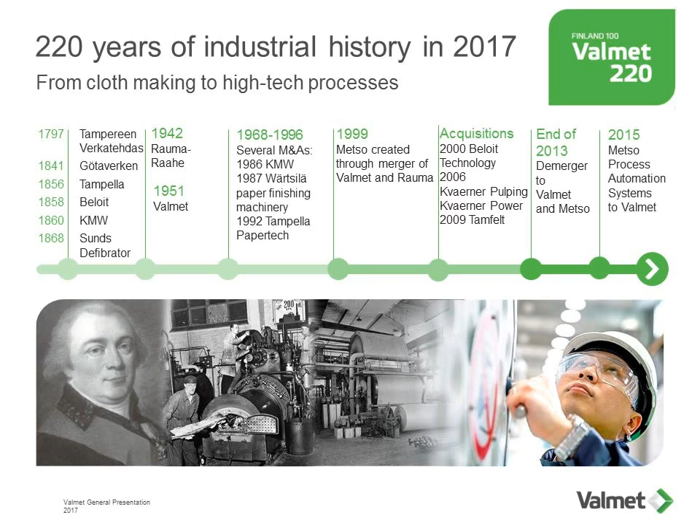In terms of our business, Valmet is roughly a €3 billion company, a little bit more on the orders received in 2016, a little bit less on the net sales side. We had about 200 million euros in EBITDA, which equated to about 6.7%. Our goal now is to increase - the story we go to the stock market with is we want to be an 8 to 10% company. We have, since we've spun off, grown every year in terms of our profitability, and we expect to do that as we develop the organization further.

In terms of geographic breakdown globally, Europe is our biggest market, close to 50%. North America is second with roughly 22%. We float around 20% year after year depending on how cyclical the capital business is and how these stable businesses continue to grow.

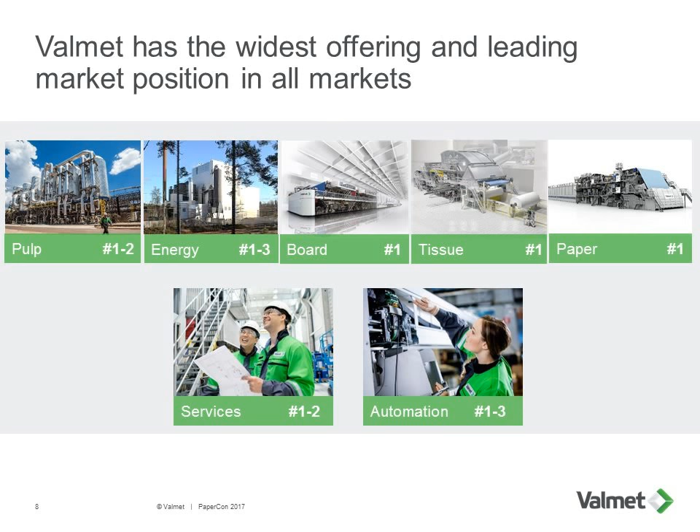I think that our offerings in general - we're offering a host of solutions, equipment, and so forth across pulp, paper, and energy. And generally, we feel as though we're, if not number one, right in the top of the spectrum in terms of what we offer. And again, foundationally, service and automation we're very focused on in terms of bringing those solutions into North America more and more. We like to think of ourselves as a process technology supplier, but of course, again, just to repeat myself, we're very focused on service and automation. We bring all three corners of the triangle together for providing solutions.

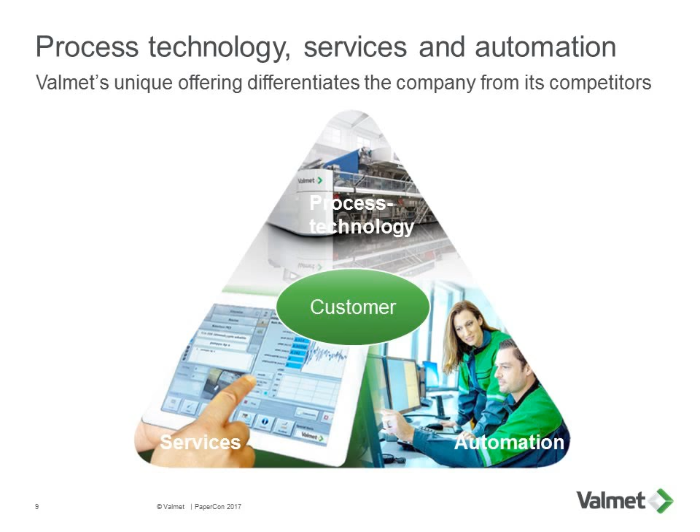We are very proud of the fact that we're recognized as a company that's on the Dow Jones Sustainability Index. The second year we reformed as Valmet, we were acknowledged for that. We take pride in building sustainability into our designs, but also the way we operate. And we are seeing across the world, really, our customers are not expecting it - they're demanding that we are operating in a sustainable way. And as well, we want our sub-suppliers to operate in a sustainable way.

In terms of research and development, my colleagues will talk about this in more detail in their presentations. I'd just say we have 16 R&D centers and spend more than 60 million euros annually on developing products and solutions. We try to focus on gaining insights from our customer base in terms of needs, whether performance enhancing or reduced maintenance. But at the end of the day, it's all about producing a better product for lower cost, and that's what we're trying to achieve.

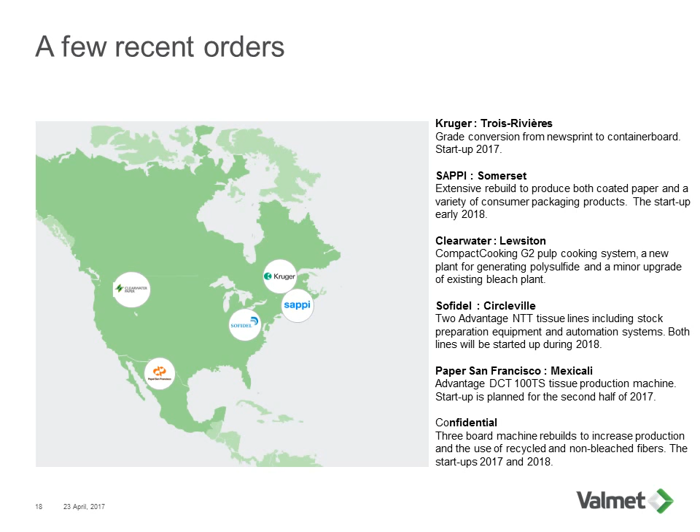So just an overall sampling of some of the activities, as well as our ongoing service and stable businesses. So in summary and conclusion, we would say that North America is quite active, particularly when you talk about grade conversions, upgrades, but also new machines.

We see that investments are stronger - and I know this is kind of general - but investments are stronger in tissue and board and declining in newsprint and printing and writing. I think everybody in this room probably knows that already. We are continuing as Valmet to invest in the things supporting the market, supporting the demands of the customers. We're doing that globally, of course, but we're trying to focus on North America because North America is a mature market and has its own set of needs and so forth.

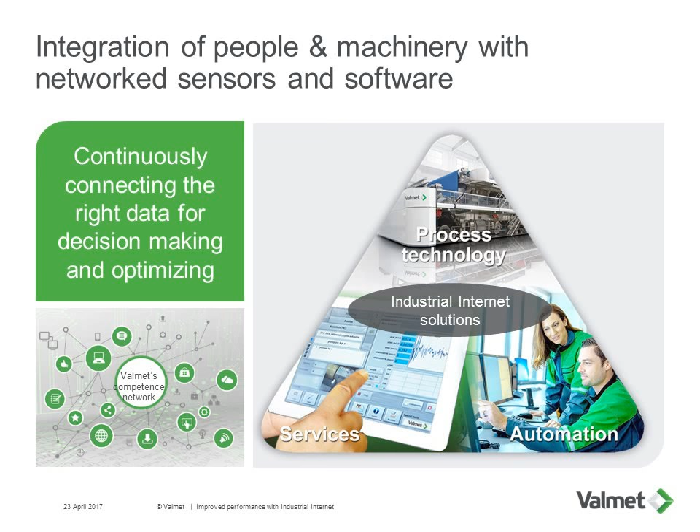And we have all the pieces to really be able to develop industrial internet in the direction that we feel is most useful to you. Process technology, services, and automation all really feed into this solution.

So today we actually have already quite a number of applications in place. As you can see from the numbers here, we've supplied 780 lines with Valmet automation platform, 380 condition monitoring, and with over 70,000 tags, 350 advanced process control installations. And there, especially the performance side is very important. They all have remote connectivity, and some of the industrial applications of industrial internet infrastructure is already there. And 90 performance agreements with remote connections.

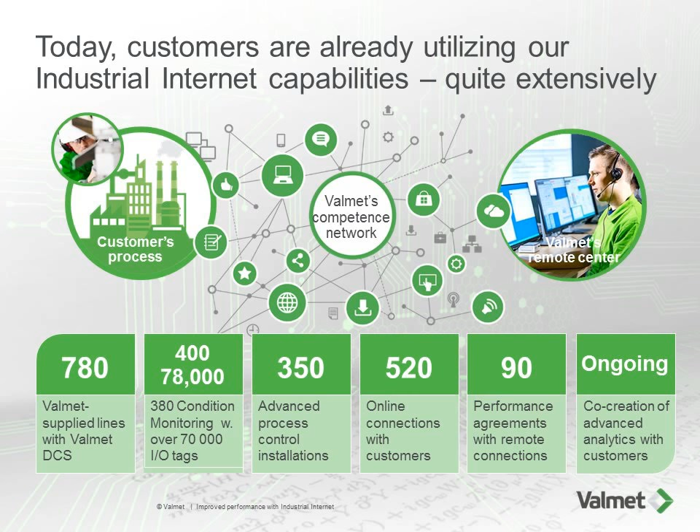And finally, and this is the piece that I want to focus on a little bit, and I specifically said co-creation here of advanced analytics with customers, because this is not just done by us. This is where we need to work together to advance the analytics part of it, and that's where we are heavily engaged in now. We have done several applications, but most of them came as a driver for our business where we see the need. But now is the best time to cooperate in this area and hear some of your needs.

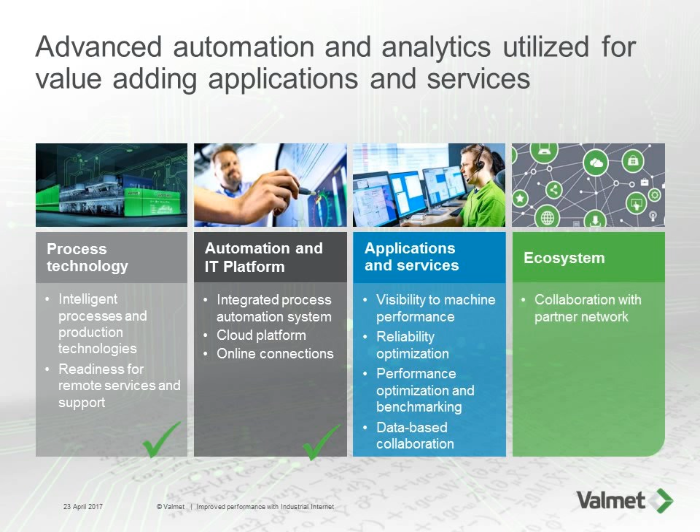So another view here, looking at the advanced automation analytics and utilizing that for value-adding services. We already have the process technology. We have the automation and IT platform in place. And now our focus area is application and services, more in terms of analytics.

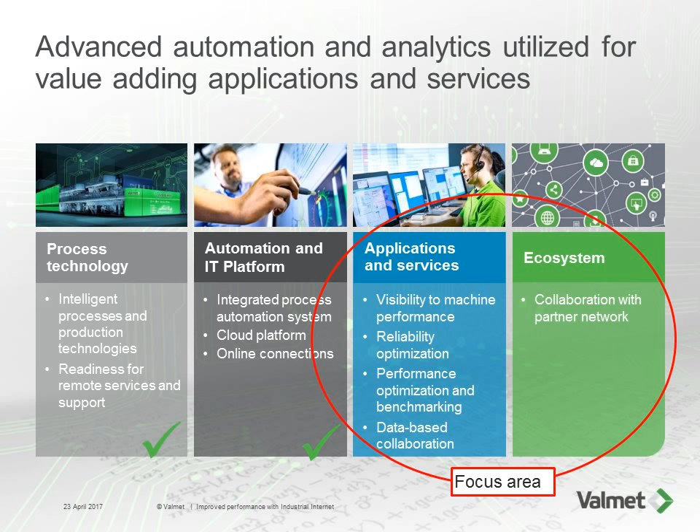Of course, these applications we have supplied on machine applications for a long, long time, and we've connected that remotely. How do we take that another step further? That's where we are heavily engaged in now. And ecosystems, that's mostly collaboration with partner network. That's a priority for us as well.

So this is yet another view here, value generation through different levels. Expert support solutions we have been doing, as you saw from the numbers. We have expert centers. Most of our installations are connected 24/7 to experts available to serve you. Analytic solutions exist at the level where we could bring them, but now we need to do more of that. And on-machine solutions, of course, have been there for some time.

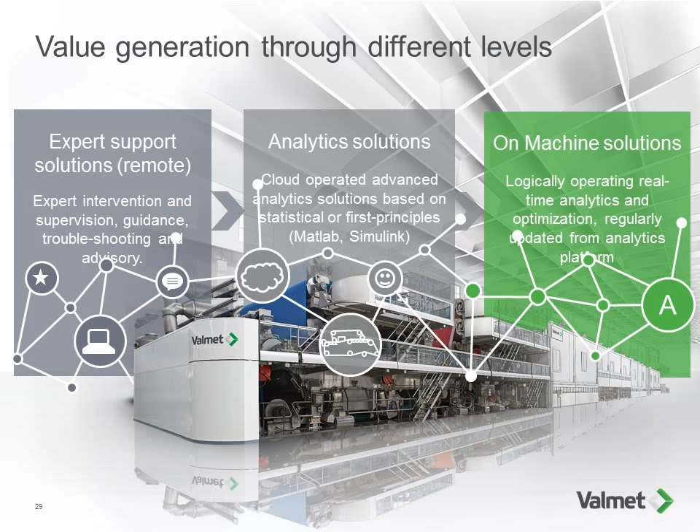So I'm just going to take one of them and then elaborate with a few more examples of industrial internet applications. This is the remote centers, which are really the engines to digital services. And there we have quite a number of installations, 780 lines, where we supply, as you saw also from Dave's presentation, performance services and reliability services. These are connected. Connectivity is no issue there. They are safe, secure connections, connecting data and experts and serving you.

They have advanced analytics, but of course there's a lot more in that area, and we do real-time monitoring with that, and provide digital services like learning from the fleet. Training modules are available, simulation modules are available. Some of these things are actually answers also to what is being discussed so heavily now, the aging workforce, experience leaving the organization. So these are some of the elements of solutions that is already utilized.

And visibility, we've been engaged in that quite a long time. Visibility to system performance, which is really now becoming more widely used also in other industries. Coming up here, when your luggage is loaded, you get a message on your phone.

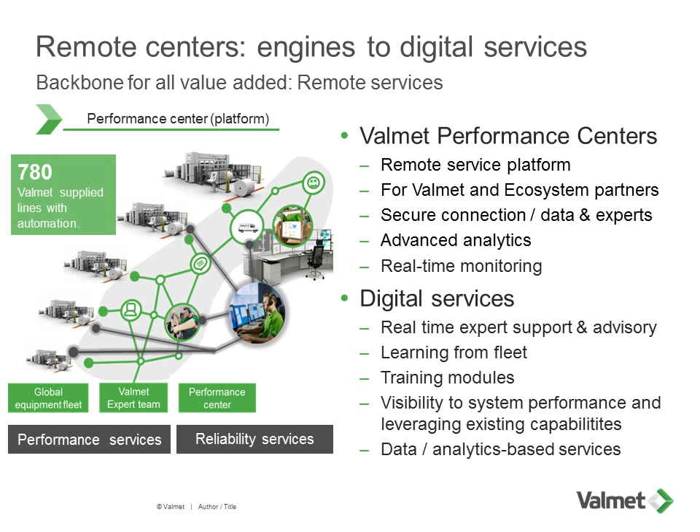You get a message of where to go pick it up, and it continuously monitors and follows, so you're constantly in touch with the things we used to worry about—is it there, am I going to get my luggage. We've been doing this kind of performance monitoring for some time, sending alarm messages to your phone and email so you have instant information. That's the urgency of data I'm talking about. Urgency really needs to be there.

Now some examples. The first is from performance visualization and benchmarking. As most of you familiar with our solutions know, we always take the holistic view of the process so we can do very effective optimization, and that's all in real time.

This is an example of fleet management where you can connect several machines to a remote center. By taking the holistic view, we can monitor production, energy, and quality. This is mostly done through well-defined key performance indicators, so the driver really is the KPI dashboards in front of you. You can receive that information anywhere, anytime, especially when it's passed through alarm prioritization and warnings—that becomes very valuable information.

Machine and shift performance comparison leads me to benchmarking. All of those things exist now. And how do we do it? Through dashboards created in Valmet Cloud and visualization through Valmet Portal.

The portal is another activity we're heavily engaged in, now developing it in a certain direction. This is where we need your input. We're already piloting it, and we'd like to get engaged in discussions with you. The direction really depends on your needs, and that's where we need to co-create the concept, the future concept.

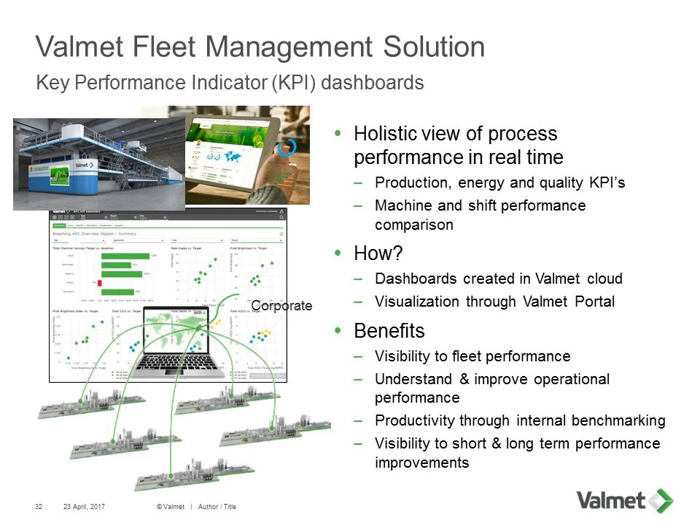Benefits are obvious: visibility to the entire fleet, understanding and improving operational performance, productivity through benchmarking—that's very valuable information—and long-term and short-term visibility of performance.

This is an example of benchmarking where the one in black is compared to other operations, including some average operations like liner grade average in the second line, fluting grade average, so you have a very good basis for comparing the machine and monitoring in real time what's happening to it.

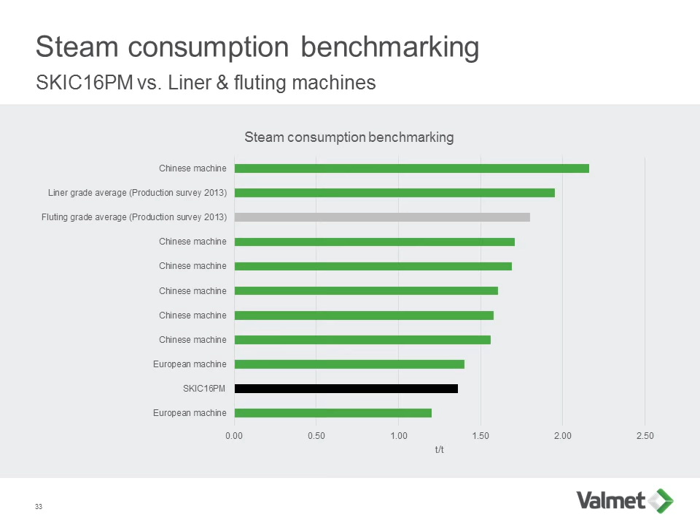The next case is diagnostics, again related to performance. This can also be done with a fleet type concept or a single machine. Here's an example we've done: FormMaster with KPI monitoring.

This is making sure that the strength properties and formation and uniformity are good, where data is received from the FormMaster.

Through an industrial router, we put that data in the cloud, then connectivity to Valmet offices and the customer portal. Through this kind of means, you get a good idea of the equipment status, the need for service, the maintenance needs—that's really where we are headed: alarms, fleet data, and connection to the Valmet expertise center.

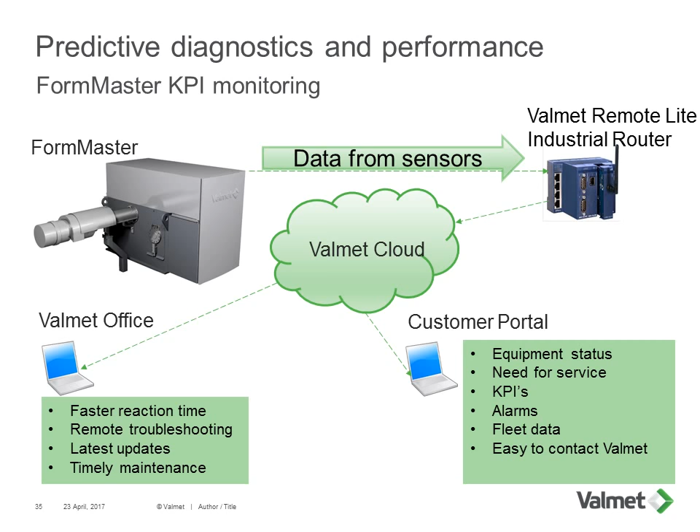That way we can react faster, do remote troubleshooting, know exactly what's happening, and advise you of maintenance needs. This is really for better availability through constantly real-time monitoring of the system.

Now you can take this in several directions. It's not just limited to one piece of equipment like FormMaster—you can do this on the presses, the reel, the winders. And the other direction, of course, is all of your machines, all the machines of the organization. So in two dimensions, this can grow for your organization and bring a lot of benefits.

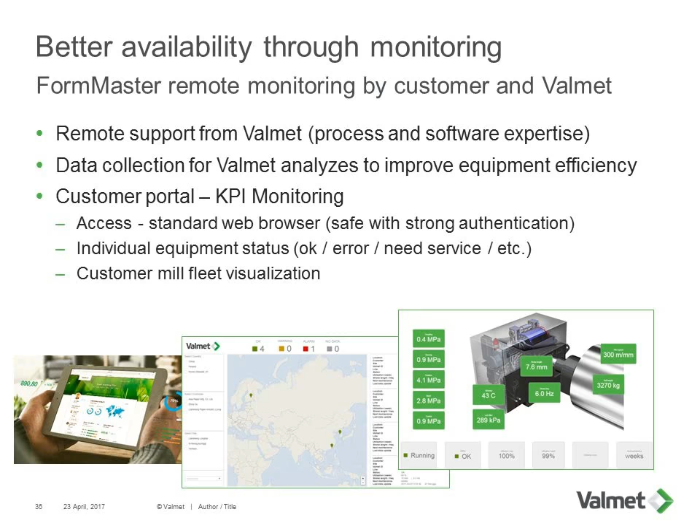The next example is energy optimization. Again, this all goes down to the bottom line—you can achieve significant savings in both steam and electricity through data analytics. My example here is from Thailand, PM16, where I have the machine data making 90 to 150 GSM recycled fluting. Design speed is 1200, and it was started up in 2014.

Here we've applied our solutions, and you can see the result is increasing the steam efficiency for the same grade, at 125 GSM, at 45 tons per hour production rate. It went up to 1.46 from 1.28—sorry, I switched consumption to efficiency there, it goes the wrong way otherwise.

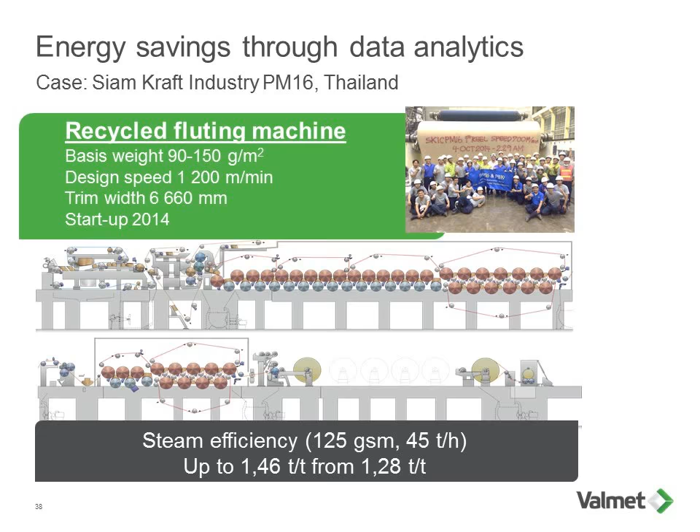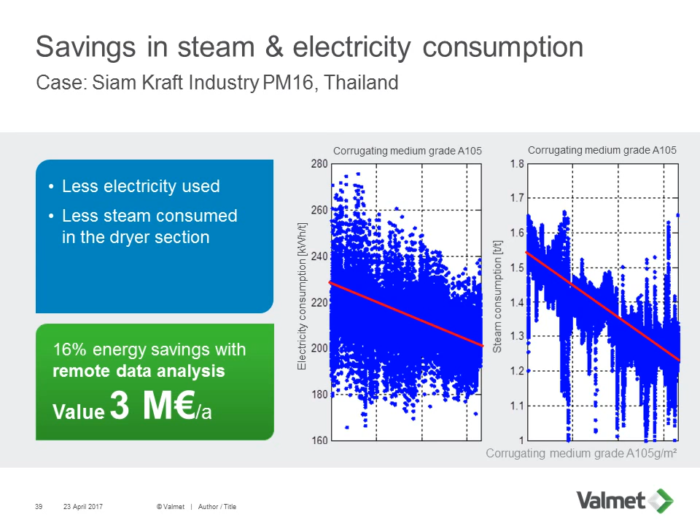The result is 3 million euros per year in savings, combined electricity and steam. The next case is paper quality control and variability reduction, again through modeling linerboard strength properties online.

You see here burst index and SCT CD index modeling, the blue and the red are hardly possible to distinguish. One is the model, the other is the real data. So you can see there's an excellent fit between the measured and estimated burst index and SCT CD index. Again, the details are given there.

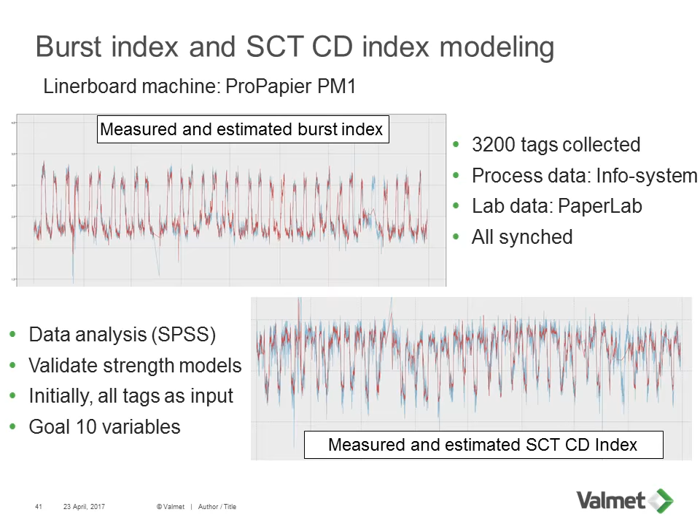A lot of tags are monitored, with data coming from different sources, and they all have to be synced. You can't just use that data without good synchronization. The method here is through statistical methods. We do the data analysis, validate the models, and then reduce the tags to the ones that really matter for predicting and estimating. In this case, 10 tags.

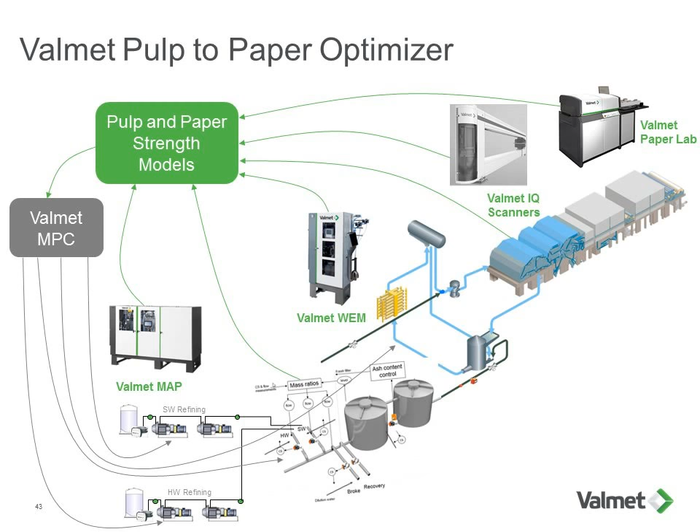The next case is Pulp to Paper Optimizer, from Stock Prep Modeling and Optimization. Here again, measurements matter a lot. We have the freeness measurement called MAP, which has recently been improved in terms of its capabilities with a high-definition camera, being able to see all the properties of fiber and fibrillation indices. Using that as the heart of this application and getting data from all the other sources we need, we're able to do strength modeling and improve the strength properties.

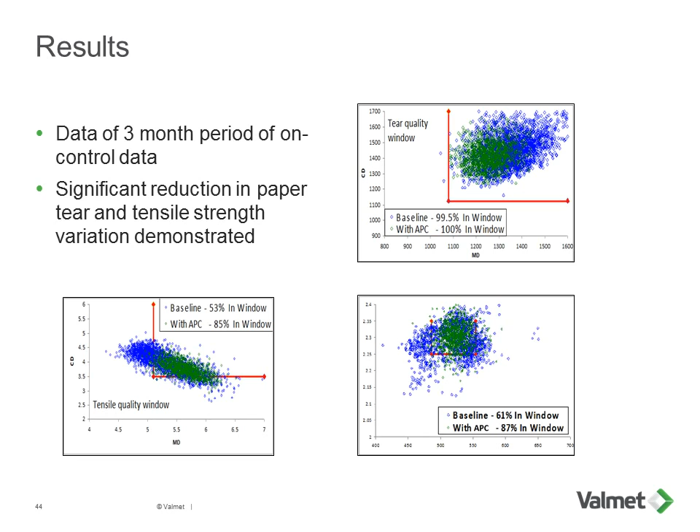You can see here an example where this was applied. You see the tear and tensile qualities here. What the data indicates is that the blue is when it's off control, so it's a big cluster spread around, a lot of variance there. And the green is after the application of this kind of thinking. So there's a significant reduction in paper tear and tensile strength variation, as you can see.

And we'll continue with Rex, looking at the R&D work at Valmet.

Thanks, Seyhan, and good morning everyone. As it says up here, my topic this morning is Valmet's R&D at work. And by the phrase 'at work', I'm referring to the fact that I'm going to give you 4 examples of things that are in various stages of development and implementation. Two of the topics will be things that are already commercialized, doing quite well. One will be in a prototypical stage, and then one is fully under development.

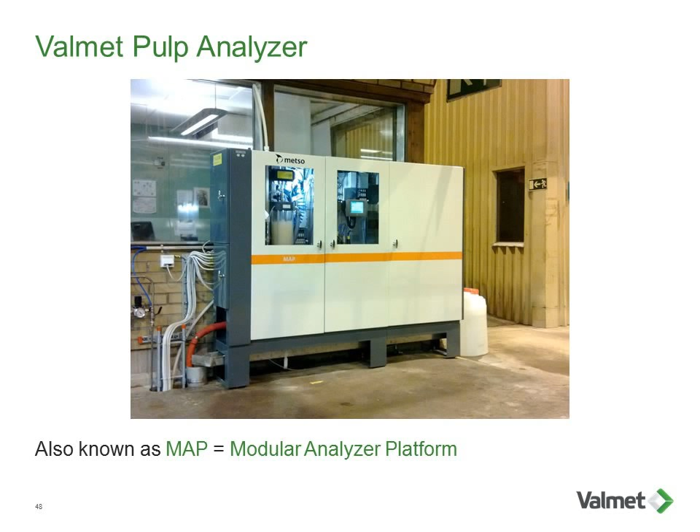Let's start with, surprise to me, a topic which Seyhan just touched on, so I'll move through it a little more quickly than originally planned. If we look at our Valmet Pulp Analyzer, or the MAP system as Seyhan referred to, this is a remarkable system. It does an excellent job of measuring pulp and fiber characteristics coming to the machine. You can see that it's very well accepted, with 238 references in the world and 68 in North America.

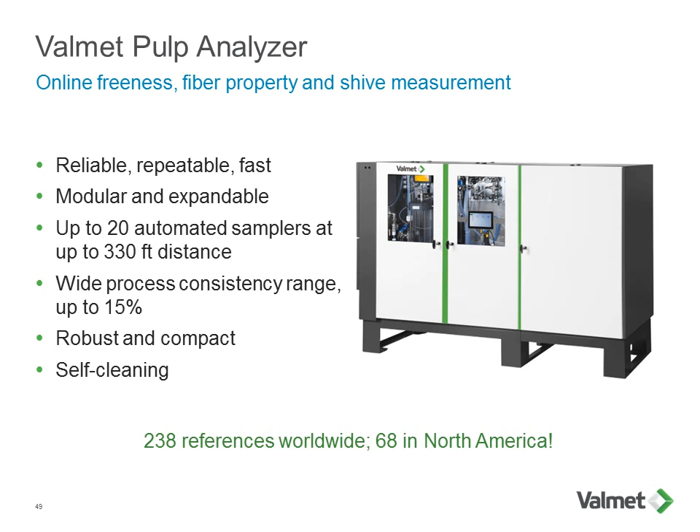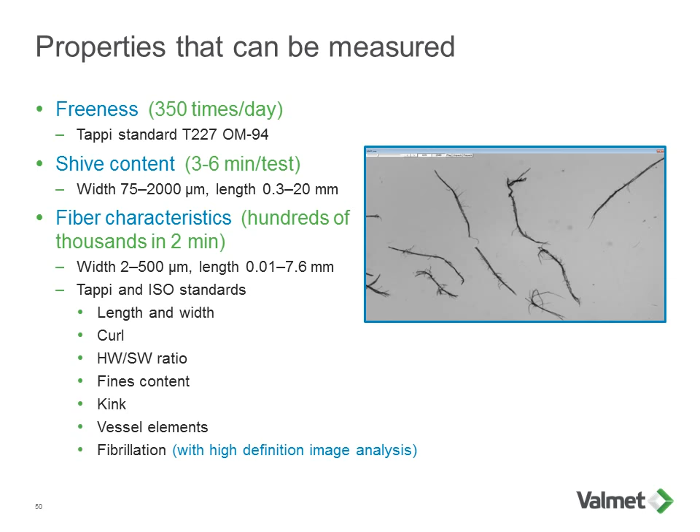What's remarkable about it is all the properties it can measure. Obviously freeness and shive content, but look at the fiber characteristics down at the bottom of the chart - odd things like curl and kink, and a fibrillation index with our high-definition image analysis capability. These are important characteristics for making paper and board, and this is the example Seyhan just showed.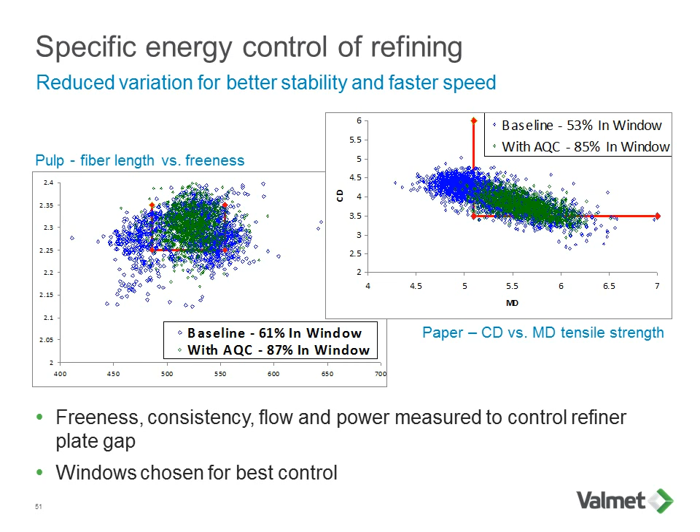But imagine doing this in a real-time predictive mode, where you could take these properties and measure them with the excellent capability of the MAP system, measure other process variables, and predict and control the final quality off the end of the machine. And that's exactly what our automation guys are working on right now.

So here's an example of some of the modeling we're doing. This is a plot of STFI stiffness, and we're measuring various properties of the furnish using the MAP system and measuring important paper machine process variables. The green curve shows the actual measured STFI off the machine. The orange curve shows what our predictive model says the property should be. You can see the agreement is excellent, very low error here. That's remarkable that we can do that.

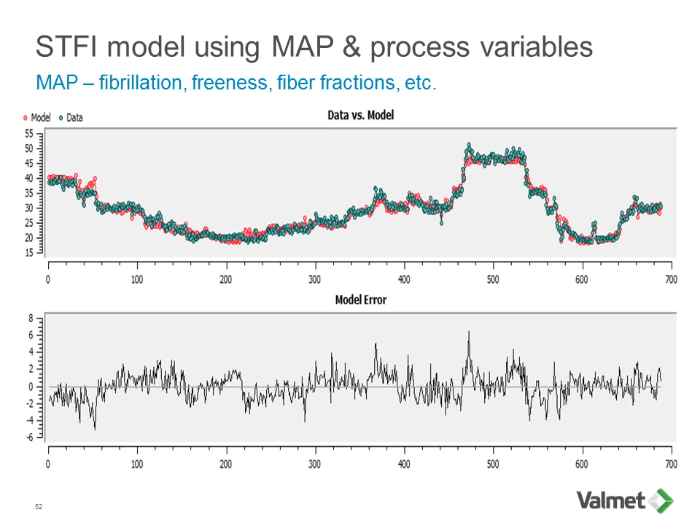There's another example from the same work. This is looking at Mullen, or burst strength. And again, excellent agreement between the predictive model and the measured quality off the machine.

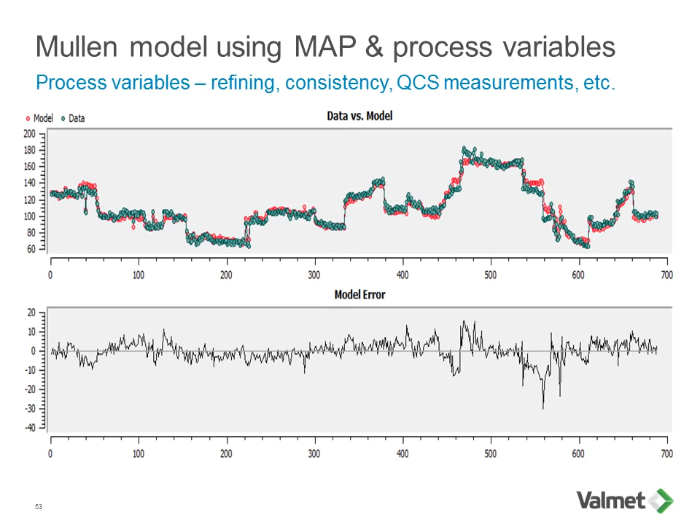If you really want to know more about this, come to a session on Tuesday afternoon. We'll be presenting this paper using automation to predict and control board strength properties in real time. It will be presented by Greg Freilich from our automation group. It's Tuesday afternoon, 1:30 to 3 o'clock, a joint session of the process control folks and the recycled paperboard people. I think you'll find that a very interesting topic.

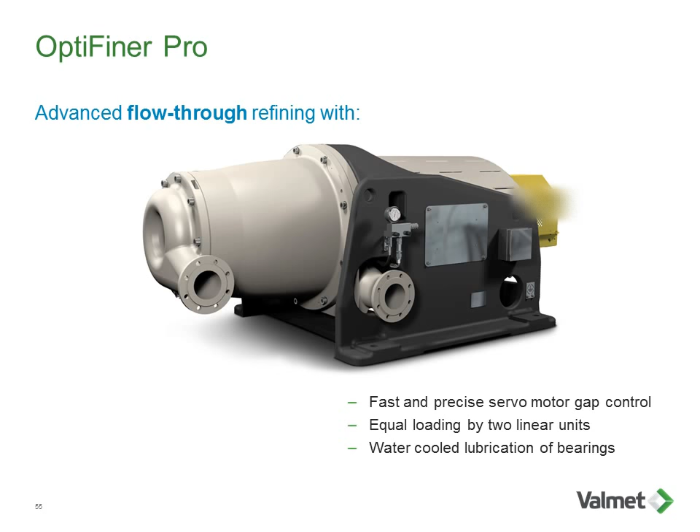My second topic is something closely related to this, and this is some new refining technology. This is well implemented and gaining acceptance all the time. What's special about it is we call it advanced flow-through refining. If you have old conical refiners or double disc refiners, most of you know that a lot of fiber passes through those devices without getting much treatment, and they have very high no-load energy use as well.

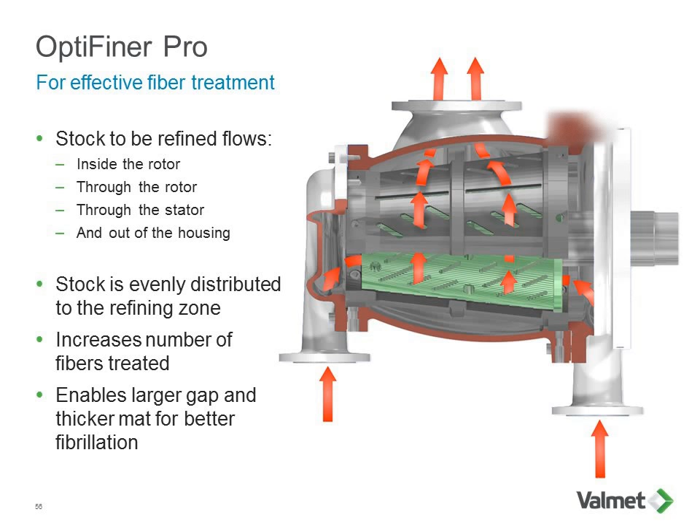What's special about OptiFiner Pro is how we manage the stock flow through the refiner. If you can follow these red arrows, at the bottom you'll see there are 2 arrows. We're bringing stock into both ends of the refiner at the same time, and it enters inside the rotor. Then the stock must pass through slots in the rotor to the gap between the rotor and stator, and then it has to pass through slots in the stator to get to the housing of the refiner and exit the process. So it's very difficult for a fiber to pass through this without getting treatment, and we have much more effective refining going on in this process as a result.

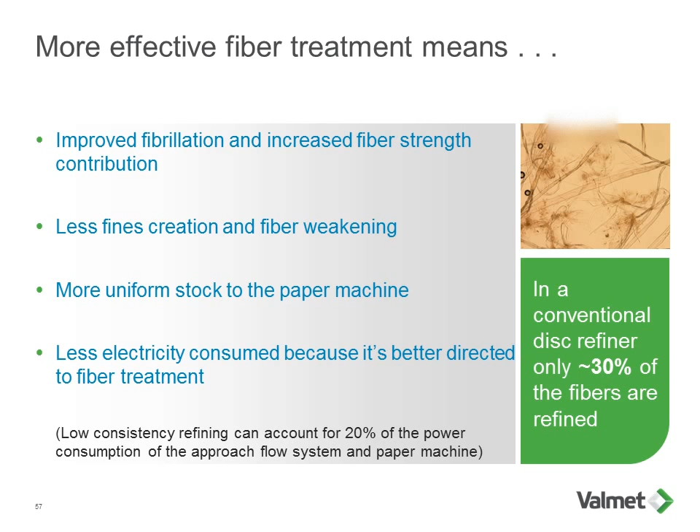What we get is typically a lot more emphasis on fibrillation and getting more contribution of the fiber strength to the final product quality, creating less fines, doing less cutting, definitely more uniform stock going to the paper machine. Ultimately, we find that it has a very low no-load power requirement, so it's a much more efficient process as well. Here's an example of the strength development.

It's a tear and tensile, combined tear and tensile plot. If you look at the green and orange curves at the top, those are OptiFiner Pro. The black and gray curves below that are traditional refining. The key is for any specific energy level along the x-axis, we're getting a lot more fiber development with this type of refining.

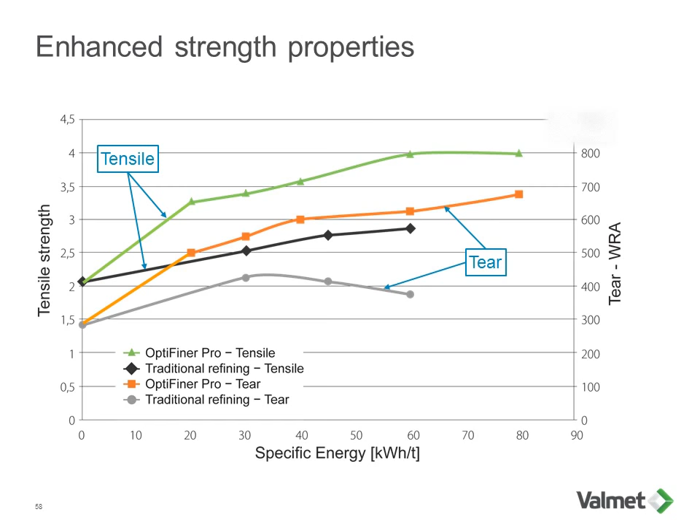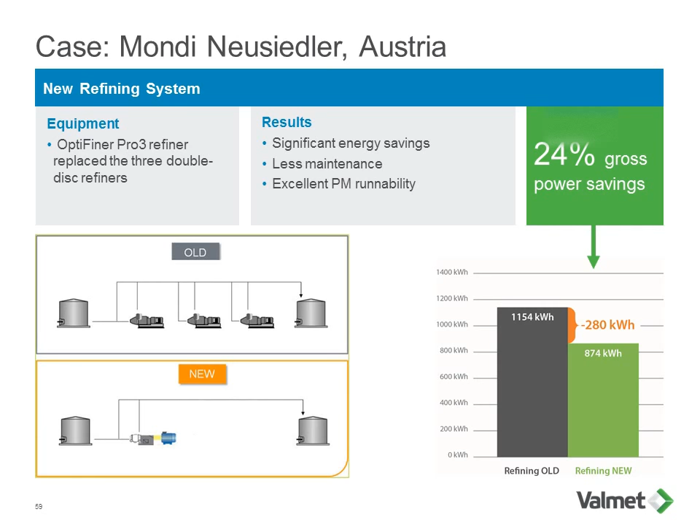So over 70 of these have been sold so far, and I like to think of something like this in combination with the MAP measurements and the real-time predictive modeling we can do. Some of this is going to come together very nicely.

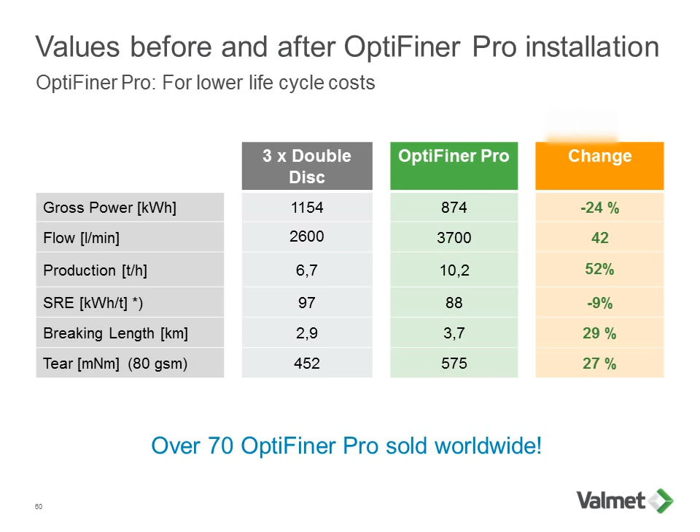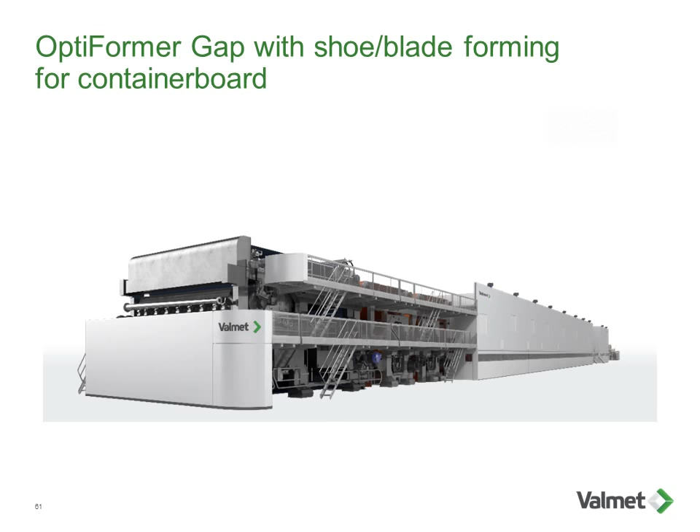My next topic has to do with a new approach to gap forming for containerboard, and we call it OptiFormer Gap with shoe blade forming. If you look at the trend in containerboard forming concepts worldwide for about the last 20 years, we see that overall basis weights worldwide are tending to go down, machine speeds are going up, there's more use of recycled furnish, and the quality of recycled furnish is getting worse too.

If you look at the forming concepts on this trend chart here across the bottom, on the left side you see multi-fourdrinier or fourdrinier-based forming. It has overall a higher basis weight capability, but typically slower speeds, max speeds of around maybe 3,800 feet per minute. Over on the right side of the chart, an extreme, are the gap formers. These are the fastest machines in the world, up to 5,000 feet per minute. Most of them are on recycled machines with size presses as well. And of course, the reason for that is also the characteristic MD-CD fiber orientation associated with these processes.

So fourdrinier on the left side, you can see the minimum gets down to about a 1.7 ratio. Typical roll blade gap formers maybe can get as low as 2.5. And of course, that's a detrimental thing when you're aiming for CD ring crush or CD stiffness, that sort of thing.

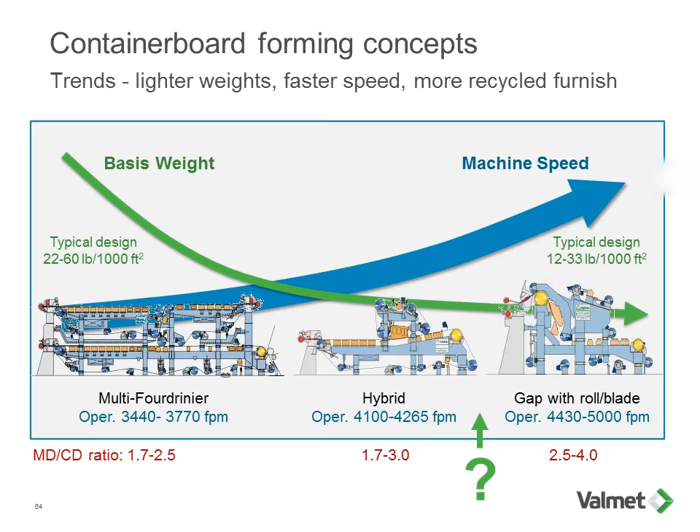So what if we have a concept that's somewhere a tweener, if you will, and that's what I'm talking about. With this OptiFormer Gap with shoe blade technology, you can see on the left side we have a 2-layer head box feeding the gap between the top and bottom fabrics. What's most important here is we're doing less aggressive initial dewatering than what we would with a suction roll in a conventional gap former.

Right after we get past the gap, we've got a 2-chambered curved vacuum shoe on the bottom. On the top, we have a 4-chambered suction unit with 21 blades at the back end for doing pulse dewatering as well. The initial formation of the web takes place very quickly, but without pulsation. So we're getting very nice surfaces formed, very good retention, excellent formation quality. And then when we've consolidated the web a little bit more, we're hitting it with the pulsation drainage.

You can think of it a little bit like a hybrid between a hybrid and a gap former, if you will. And what we see, what's a nice feature of this, is the MD-CD ratio is reduced. We can get down to 2.0 with this technology.

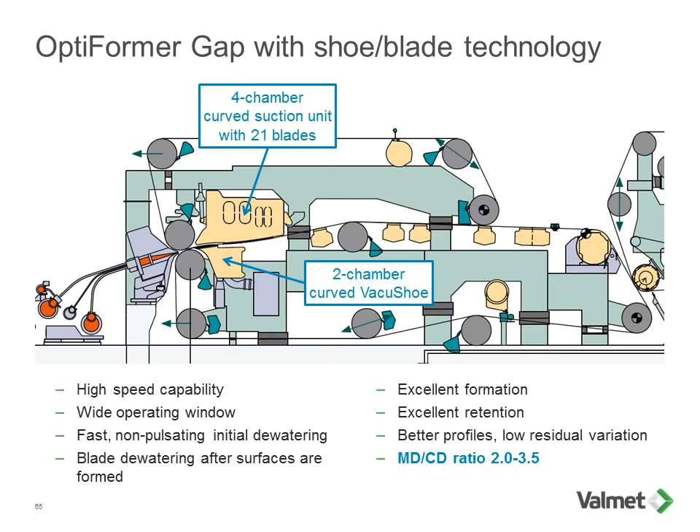Looking at another comparison we recently put together for an example of a 222-inch reel trim making 19 pounds per 1,000 square feet recycled liner and medium. You see on the right side of the chart, in terms of speed capability and production, a 23% gain with this new type of former.

But it's also noteworthy that it takes a lot less power for the approach flow system and the forming section. We see about a 40% reduction in the electrical power requirement for this kind of section. And you can see, obviously, just looking at it, the length difference. In this particular example, the forming section is about 60% shorter than the fourdrinier section. So those are also pluses.

The minus, down at the bottom I have in red, is again the MD-CD ratio is not quite as good. Well, what can we do about this? Well, as I said, most machines of this sort in the world now have size presses, and actually there's an increasing trend to size press use in North America as well.

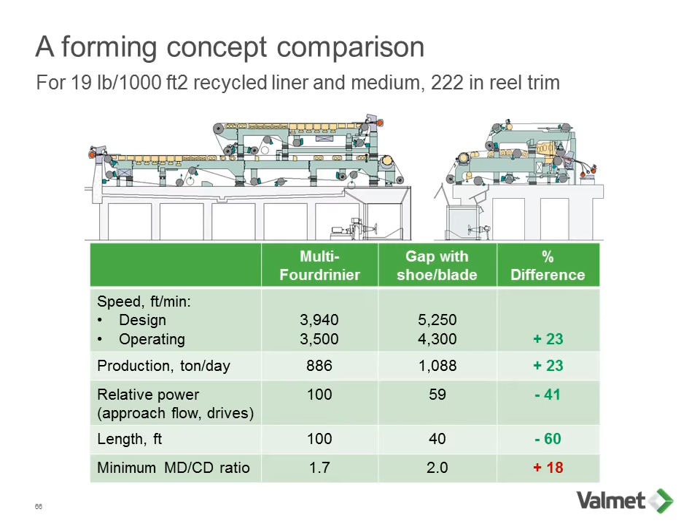But something else we can do is we can use our Aqua layering technology. So on the first slide, I showed that this is a 2-layer head box. Well, in between these layers, we have a water layer that we can put in there. That can be used for good layer separation if you have to do different furnishes. But you can also put starch there. And it's a much more effective way to put starch into the web to strengthen it than putting it in a machine chest, for example.

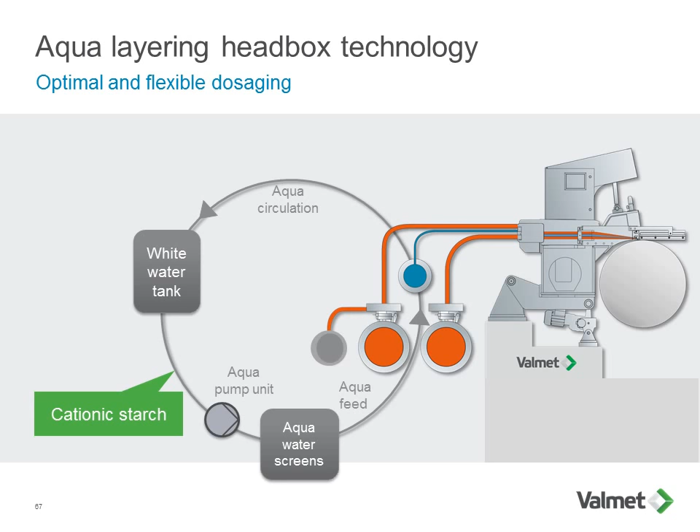So I think what we see is that, with this higher speed capability and lower MD/CD ratio, and also thinking about using aqua layering with starch and perhaps size press, we have a pretty interesting example of a new way to make containerboard.

We've sold 3 of these forming sections so far for containerboard. None of them have started up. 2 of them are on rebuilt machines, and 1 is on a brand new OptiConcept M machine, which will start up this fall in Italy at Pro-Gest Mantova. You can see that it's about a 300-inch wide machine with a design speed of roughly 5,600 feet per minute, making 15 to 33-pound recycled liner. I think it's going to be interesting to watch these startups. We're starting to see a little different trend in how we go about making containerboard at very high speeds.

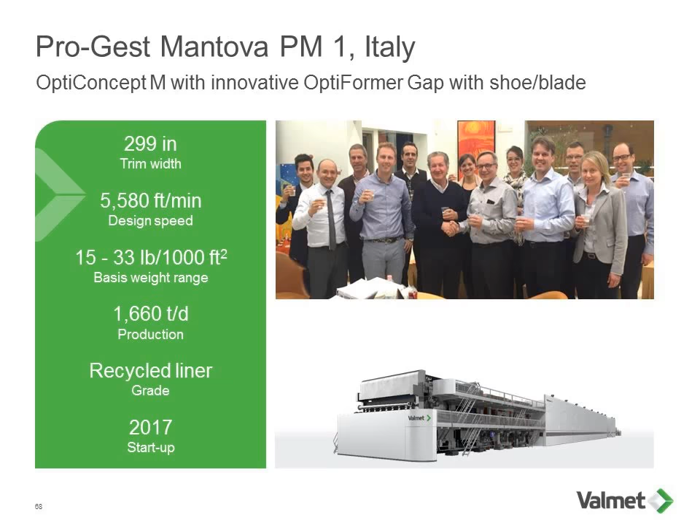Let's move to the dry end for my last topic. Let's talk a little bit about winding.

Anybody out there wish that they could prepare parent rolls with less waste, faster, and more safely? Yeah, I see some heads nodding. And does anybody have a need to increase winder capacity? Yes. So that's what I'm talking about.

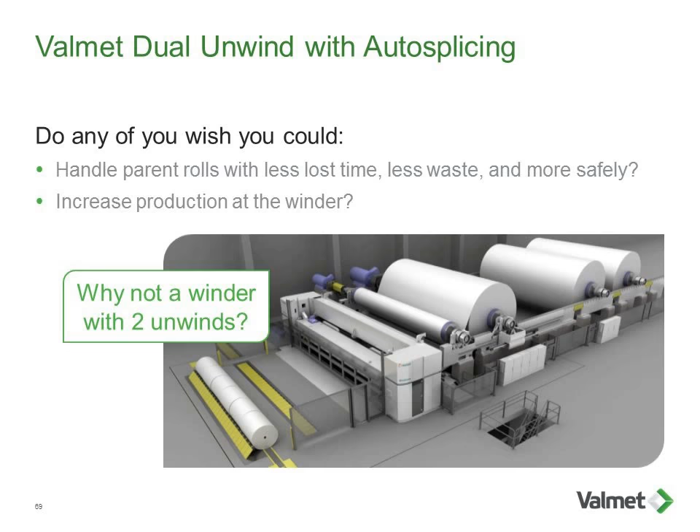Why not a winder with 2 unwinds? You may wonder what that means exactly. If you look at the different ways to increase winding capacity, this list here, we do all these things all the time. But in particular, things like decreasing set change time, increasing accel and decel rates, making very large parent rolls to improve capacity. These are all big pluses, and you can see the relative percentage gains over on the right side.

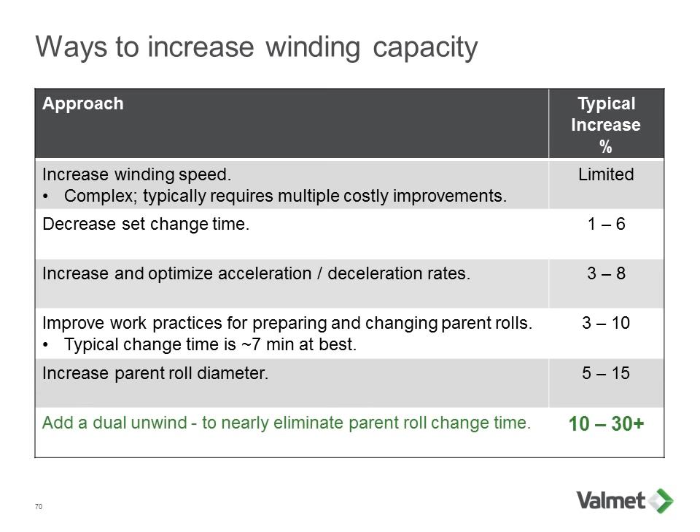But look at the bottom line. Using a dual unwind, fully automated with automatic splicing, we can get capacity gains of 10 to 30% or even more just by doing that.

This is the section I'm talking about, in this hash mark area. You can see the parent roll running into the winder right now, and immediately behind it, the next parent roll. We're talking about both of those. There's also an electric carriage system to automatically move the parent rolls around, and a splicing system as well. We've sold 21 of these, and roughly half are in operation.

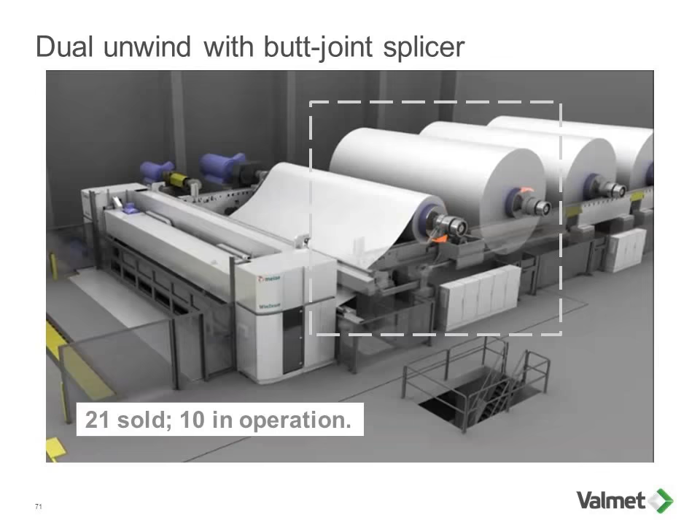Here's how it works. The winder's over on this side of the screen. When we get to the second to last set going through the winder and come to a stop, during that set change, the parent roll on the left gets automatically transferred to a primary unwind position to the right. Then while we're running that last set, a suction roll reaches up, grabs the tail of the new parent roll, and brings it down to a lower position to get ready for splicing. While decelerating from the last set, this brings the tail down and gets it ready.

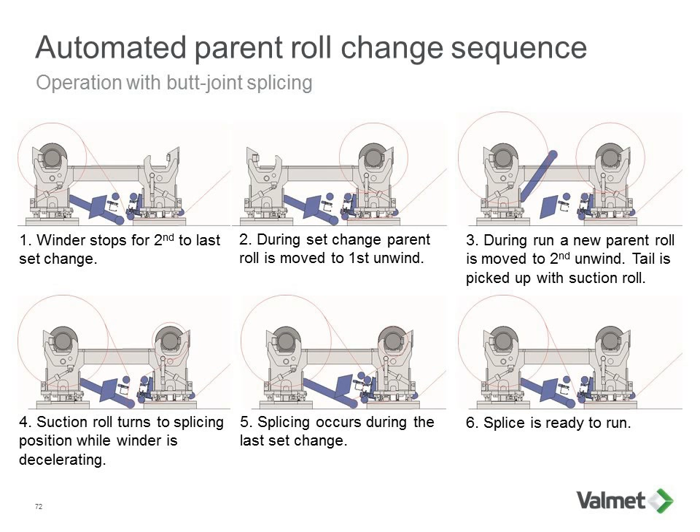Then we have an automated splicing system. We're actually making that splice—it's a butt joint splice, taped on both sides of the web when we come to a stop, and we're ready to run again. With this process, we can do a parent roll change in about 1 minute.

Here's an example for linerboard, 29-pound linerboard, on a winder that's pretty fast: 8,200 feet per minute top speed, pretty good high accel and decel figures, and pretty good set change time too. If we reduce from a typical parent roll change time with an experienced crew of maybe 6 to 8 minutes down to the 1 minute area, we're increasing the output from that winder from almost 1,100 tons per day up to almost 1,400 tons per day.

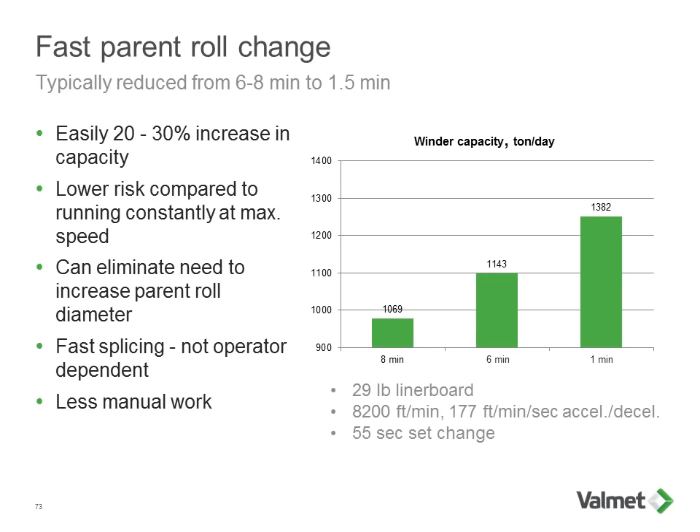That's a huge gain, and you wonder if this has been proven. Well, the first proof of it was at ProPapier in Germany on their PM1, where we have this dual unwind and splicing technology. This is the highest capacity winder in the world—one winder keeps up with a paper machine that runs up to 1,700 meters per minute. It's a world speed record holder, making recycled liner medium. This is also a very advanced winder in other respects, but the parent roll change is a big part of it, and they achieve a 1 minute parent roll change.

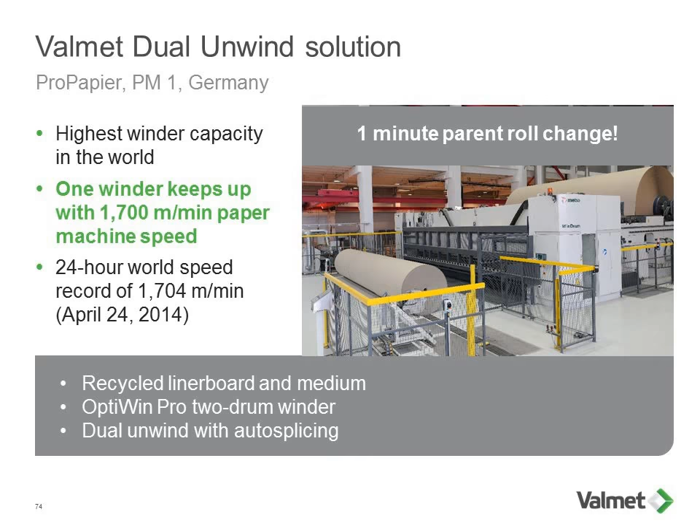So I hope you've seen that these four examples are worthwhile technical developments. Dave talked about our R&D organization some, so I won't repeat that, but a couple of these metrics I want to point out: as he said, we have R&D spend over 60 million euros a year.

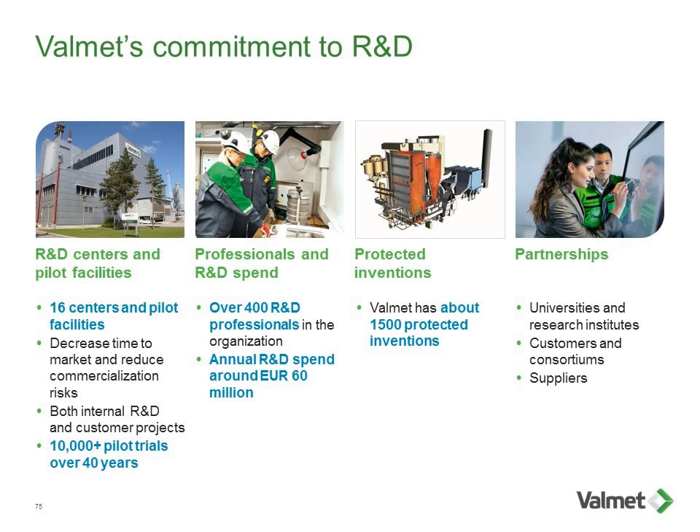He talked about the 16 centers. Many of you have been to our pilot plants and run trials with us. If you look in the bottom left corner, over the last 40 years we've run over 10,000 pilot trials. This is our own work, but it's also our work with our customers. So Valmet is very much committed to R&D—it's a key part of our success, and we think it's a part of your success as well. I hope you enjoyed those topics.

With that, I'll introduce Mike Gray, who's going to talk about grade conversions.

Thank you, Rex. Good morning, everyone here in person and those of you on the webinar as well. This is always an event I look forward to, the breakfast seminar. It's an opportunity for Valmet to showcase some of the abilities we have, what we're working on for both today and the future, and to interact with everybody up here.

I'll touch on R&D again—maybe it's a little bit of my engineering background coming out. I could listen to Sehan and Rex talk about R&D developments for most of the day, but we only give them 15 minutes. Investing 60 to 70 million euros per year has been a tradition for Valmet for a long period of time, and I'm very proud to work for this company because of that, because that investment in good times and bad leads to innovations for the industry that will make you successful. And if you're successful, we'll be successful as well with you. That's really our goal—we want to be strong, we want you to be strong, and that will make all of us much more happy in the future.

One of the other exciting things for me here at PaperCon is relationships—certainly working with customers I've known for many years, working with colleagues I used to work with in previous careers. That's always fun, and I've had a few of those conversations last night and this morning. It's kind of interesting—we used to talk about the new children we were having, those types of events.

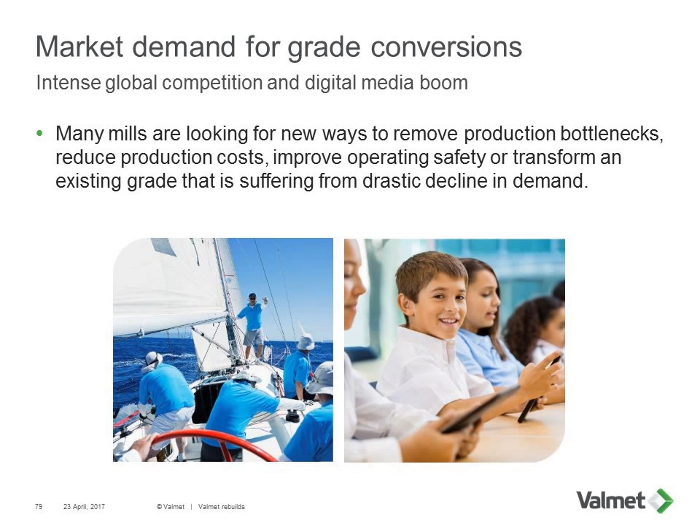So it's happening, and what we need to consider is some of those assets are very, very good assets yet. Big machines, quality machines — what can we do with those machines?

A kind of new aspect, and we saw this at Resolute and Calhoun, is maybe a mill conversion more than a machine conversion, because you can't make tissue very well for most tissue grades on a typical paper machine. But at Resolute, they just started up, approximately a month ago, a tissue machine at the Calhoun mill. They're using some of their pulp capacity there to completely get out of that grade and into tissue. I expect in the coming months you'll see another traditional paper producer make that same change and start to move more into producing tissue type grades.

It's a growing market. As Dave mentioned, tissue and board continue to grow. Tissue probably around 2% per year, and containerboard in North America 1 to 2%. It's changing quite a bit as we go into the world of Amazon and the boxes are smaller. They're direct shipped a lot of times, not going to the big box stores like Walmart anymore, so that's putting some stress on the machines as well.

The second one here, paper to specialty grades, maybe I should have said paper to pulp. Dave mentioned Domtar - we just did a conversion there at Ashdown, and if you go back over the last few years, the Domtar machine at Plymouth, one of the machines there was converted to pulp. International Paper has also converted a couple of machines at Franklin and Riegelwood to make pulp. So that is certainly a continuous, maybe not growing, but a stable path for some of those old machines that make paper to move into those grades.

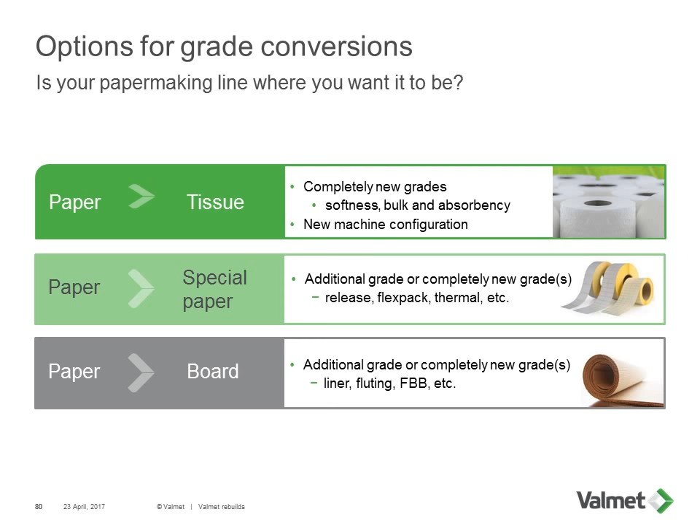And then paper to board. There's several ways to do this. If you look at what is now Westrock down in Dublin, it was SPFT at the time of the conversion - they put in an OCC plant and didn't do many modifications to the machine. There are other examples we'll talk about where there's quite a bit of modifications to the machine. It depends on the configuration of the machine and what's installed there, what needs to be done to make it go forward. Valmet's been involved in several of these larger conversions globally, as well as here in North America.

As I mentioned, a big part of that is our technology people and our R&D capabilities. When a customer is considering a grade change, first the need is market driven—as digitalization takes over, a lot of those paper grades are less needed, so there's a need to change. We analyze the existing machine: what does it have, what production volume do we need, and what quality properties do we need off those machines. Those are really the two key driving points going forward.

We've got a lot of experience in these grade conversions, along with the research and development capabilities to analyze the pulp at our research facilities—sample it, look at it, whether it's going to be some type of virgin pulping process or more likely a waste-based OCC process. We analyze that, run it on our research machine, and look at different configurations and technologies, like Rex and Sayan talked about, from both a control standpoint and a machinery standpoint, to determine what's needed to make the final sheet properties necessary to be successful.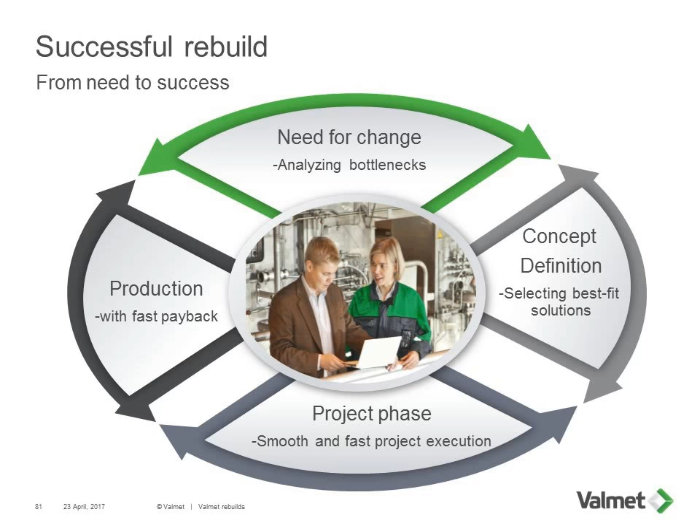During the project phase, we've done a lot of big and small projects throughout the world to make sure that what we've agreed to in the specifications is smoothly delivered, installed, and started up successfully, and then we work to get a fast payback. We want our machines and rebuilds to start up and reach high production and good quality levels as soon as possible after the rebuild or new machine installation. That's key to returns. We'll talk about that again a little later on.

I talked about our research and development facilities—mechanical pulping, waste paper pulping—certainly a couple of our strengths that we have in our research facilities, mainly located in the Scandinavian countries, Sweden and Finland.

It's interesting, if you look at the capital market for Valmet, 2015 was a very strong year, 2016 was a little bit low. Just the overall North American market, we had very good market share, but the market was a little bit down in 2017. The activity level is extremely high, both for new machinery and rebuilds, mainly again on containerboard and tissue.

One of the neat points I've seen from a research and development standpoint is that, globally, our R&D facilities had more days from North American customers than any other region in the world last year. So we have a lot of customers here locally in North America looking at their installed base and figuring out what they can do, running trials with us, either on a sectional piece of equipment or on full machines. Our two pilot machines run from stock prep up through drying and then reel it up—mainly in our Jyväskylä facility—and then down in our Järvenpää facility we have complete finishing capabilities: calendering, coating, winding, et cetera.

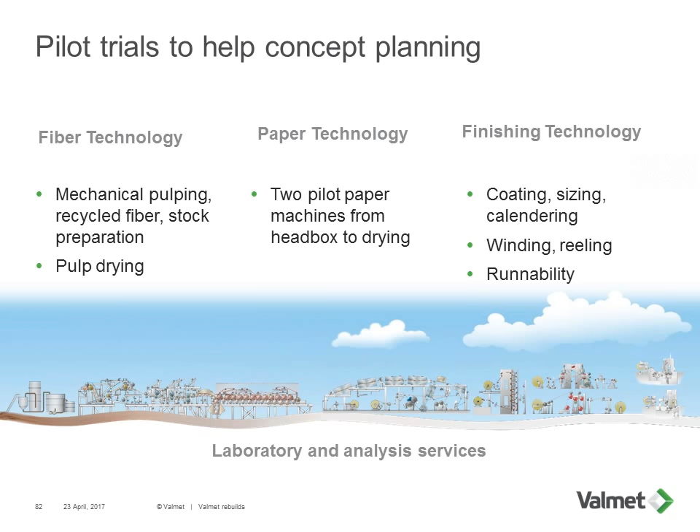So we have very, very extensive laboratories and very extensive analysis capabilities, whether it's with our fabrics division or with our machinery divisions. We can analyze what's going on at the mills, what's going on with your paper, and make recommendations on how to improve it.

I'll talk a little about blue paper—I know this isn't a North American reference, but I think it highlights a lot of what's happening with respect to grade conversions. This is actually the second time this machine has been converted; this particular one went from fine paper, originally to coated magazine, and then to liner and fluting. It follows a very similar trend to what I've been talking about and what we see customers doing, where we run trials with the customer. They say, you know, we've got to do something else. We analyze what the machine is, what can be done, and then we sit down and run trials to confirm our thinking and help the customer develop what they can successfully make on that machine.

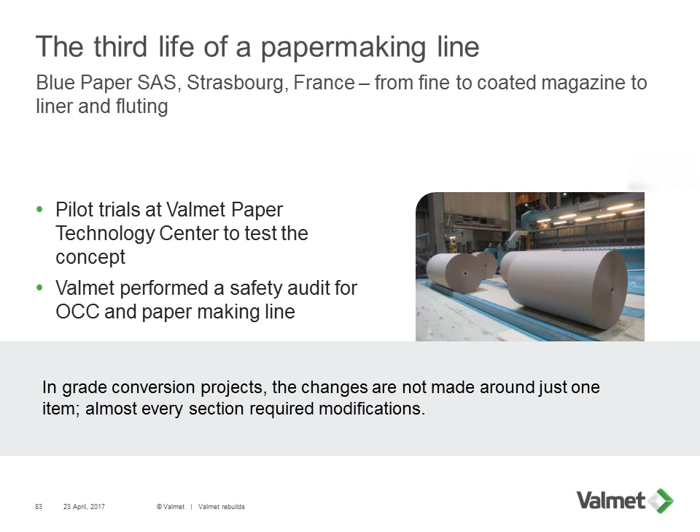We also do safety audits quite a bit, especially as Rex mentioned, on winders. Winder safety audits and safety upgrades are vitally important to our industry. It's a cornerstone of our values at Valmet, making sure that we are safe and that we're providing equipment and services to our customers that help improve their safety as well as keep everybody safe.

So this is the rebuild that was performed there, and again, it kind of highlights all the thinking. First of all, the headbox. In this case, we relocated the headbox, so a minor modification there.

We've done a lot of work. One of the issues we've seen with gap forming in North America, the fiber's long. It's hard to get MD/CD ratio, as Rex mentioned. It's also hard to get capacity. So we've developed a lot of products in the landing area of the forming zone and the forming zone itself to make sure we can best control that MD/CD ratio and gap formers, as well as get the drainage capacity. A lot depends on your furnish, but in general, a gap former would be applicable in North America from 35-pound and below. You can get up a little bit higher than that, but then your production rate starts to go down. So for high production basis weights, it's probably not the right former here in North America, but if you go to lower weights and want higher speed, it's certainly a very good way to make paper.

And at Stracel, that's a gap former. The Kruger project is also a gap former, modified off the original Valmet that's there.

So in the pressing area, again, it's strength and production level. So pretty much you're going to need a shoe press in most of these cases. You can start up without one, but it's kind of a handicap if you don't have a shoe press. And that was already existing on this machine, so it was not added there.

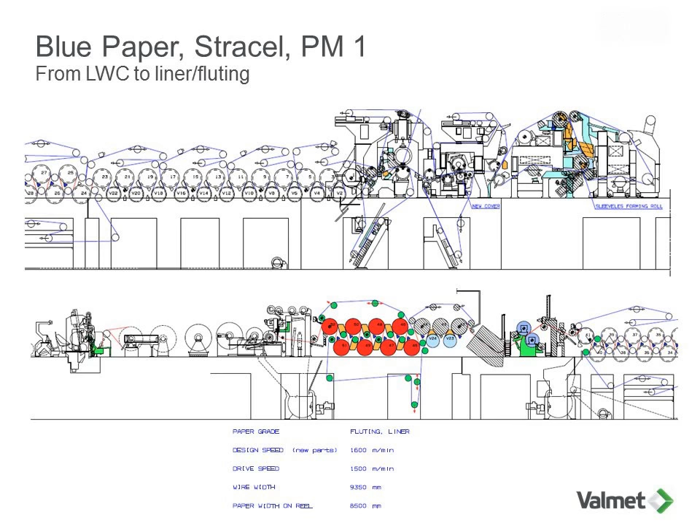I talked about North America, and one of the reasons I focused a little bit on the blue paper job is we do have two big conversions going on here in North America right now. At this time, the customer has asked us not to release the drawings or show the drawings publicly, so I'll be talking through that a little bit, but I certainly want to maintain that confidentiality that the customer has asked us to.

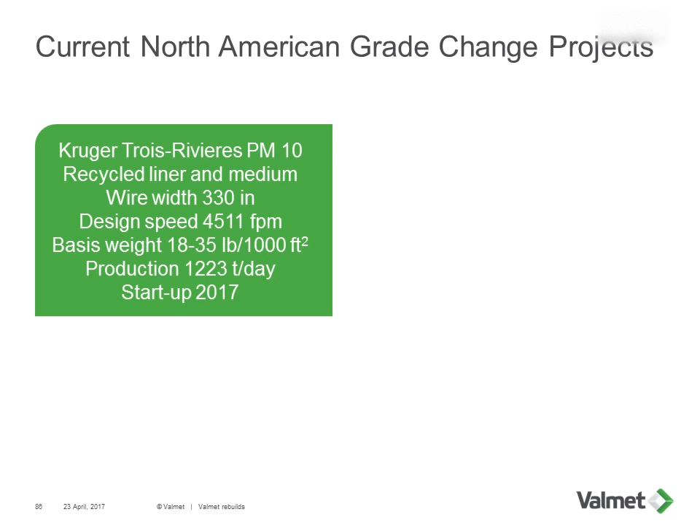So the first one, Kruger at Three Rivers, typical 330-inch Valmet making newsprint machine. Design speed's quite high. This is shut down right now, and I expect the startup to be during May. So that machine's been down for a couple months now. Huge conversion, again, covering headbox through winding, so it touched virtually every part of that machine in some way, and that will start up again in about another month.

The second one I want to mention briefly is Sappi at Somerset, wood-free coated machine, #1 machine up there. That's being converted to packaging grades as well. That one just started here a few months ago as far as the process of engineering. So we're early in the phases of engineering. We'll start manufacturing of the equipment, delivery late this year, and then a startup early in 2018.

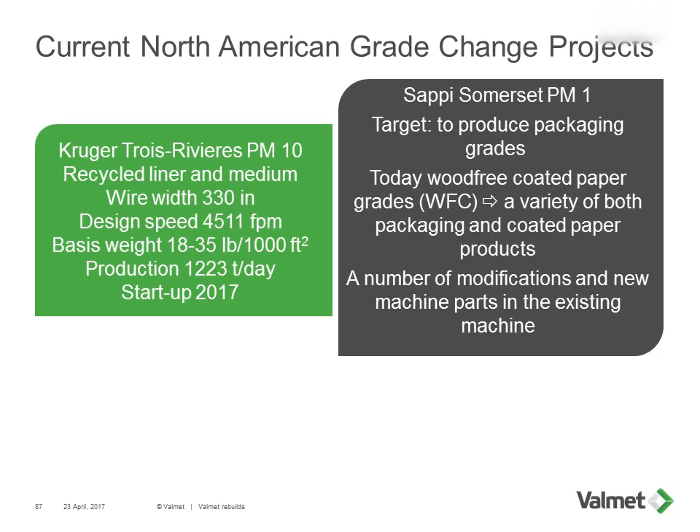So 2 large projects of conversion from paper to packaging grades. And we're hopeful that we can have those customers visit us here next year or the year after to talk about the success of those rebuilds.

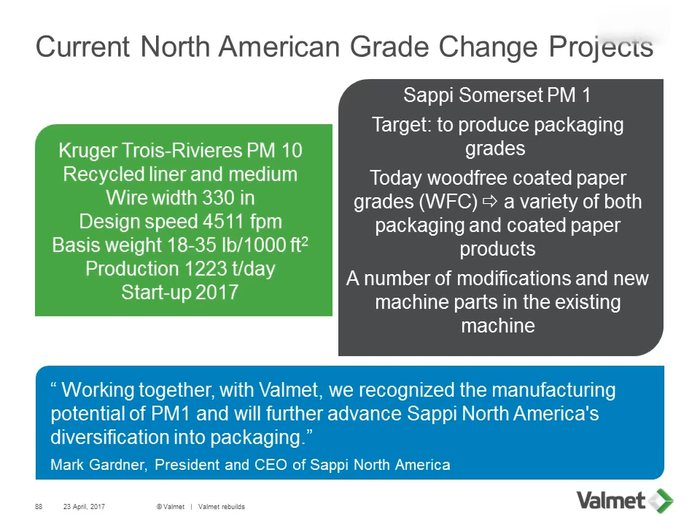I think it's great as part of this to have a customer testimonial as well. They went through the same process that we've been talking about all along. A lot of detailed discussions, a lot of research and development work to test the process and make sure the paper qualities can be met. Speaking of customers coming, we had Jay Hennessy at the meeting last year for our discussions here at the breakfast seminar from Valparaiso.

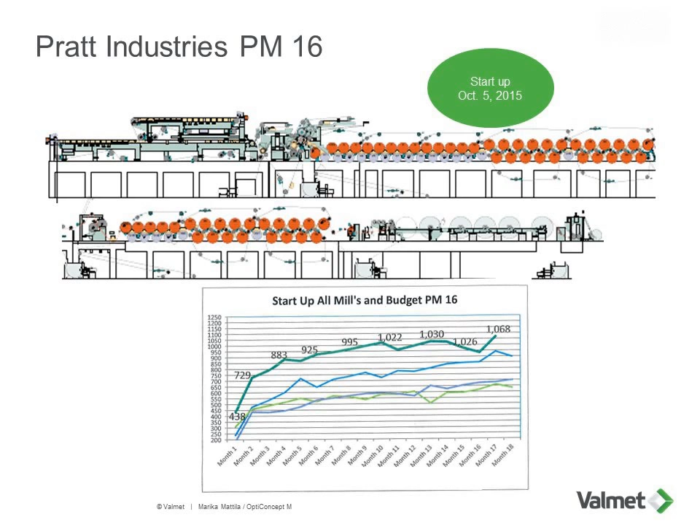I just wanted to show you the success they've had there. This is a complete new machine down in Valparaiso. What you see in green is their actual production on a monthly basis, and the next line down in blue is what they budgeted. Somewhere close to 200 tons per day above their startup curve is what they've achieved in the first 17 months of operation. So quite successful, and you can understand the financial impacts of being 200 tons per day above your startup curve. It's been highly successful, primarily from the customer standpoint, and Valmet is very proud to be part of that and to discuss it with you.

That concludes our presentation portion. As Dave mentioned at the start, we have some time now to address a couple of questions, either from those in the audience here or anybody online for the webinar. If you have questions now, we'll try to address those.

The question is what can be done to increase paper strength properties for grade conversions with gap formers. I think we've touched on a lot of those. One key development Rex touched on is the Aqua layer headbox, where between two layers of paper we have an Aqua layer, which can be water from a strictly separation standpoint between the plies. We've also done a lot of work, both internally and with customers, looking at what else we can put into that middle layer, whether it be starch or some type of highly refined fibers to increase strength properties. With the Aqua layer, we're familiar with putting starch back at the beginning of the process on the pulping side. But if we can put the starch in the middle layer between two separate plies, our retention value of that starch goes up significantly. So we can retain more starch, and if we retain more starch, our strength properties also increase quite a bit.